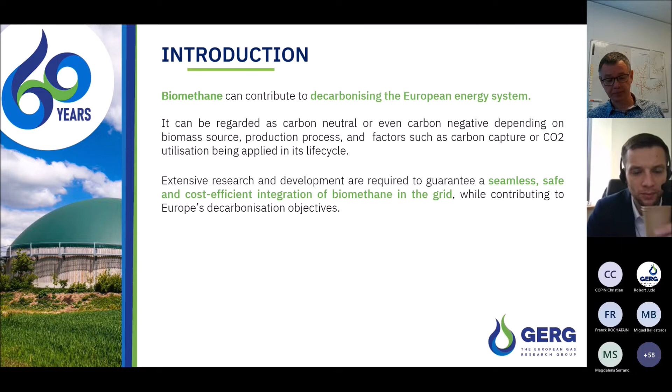As you probably heard, we have 3 sets of roadmaps being prepared: one on methane emissions, one on biomethane, and one on hydrogen. Today I'll shortly take you through the one on biomethane.

We've had an ongoing project for the last year or so, where the roadmap has been defined in close cooperation and interaction with people from the gas industry. We've been through a brainstorming phase where we identified possible R&D subjects, a phase where the projects were defined, and we have evaluated how critical the different subjects appear to be, and based on that we have created the roadmap.

So the next step will be to execute. Sorry to interrupt you, but maybe we can recall the rules, if we can interrupt or ask questions, or if we have to wait for the end of the presentation, because I saw there was a hand up and maybe someone wants to ask something. Robert or Alexandra, could you recall the rules for this morning?

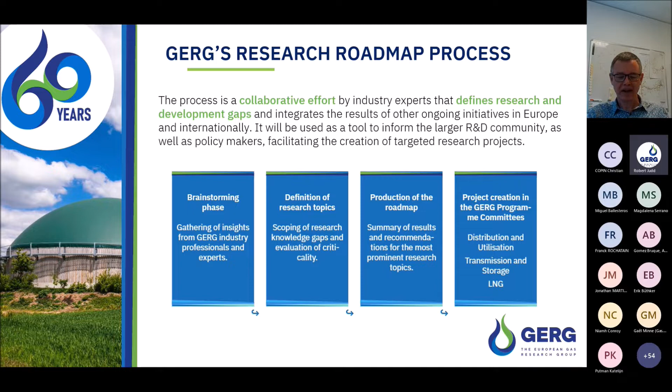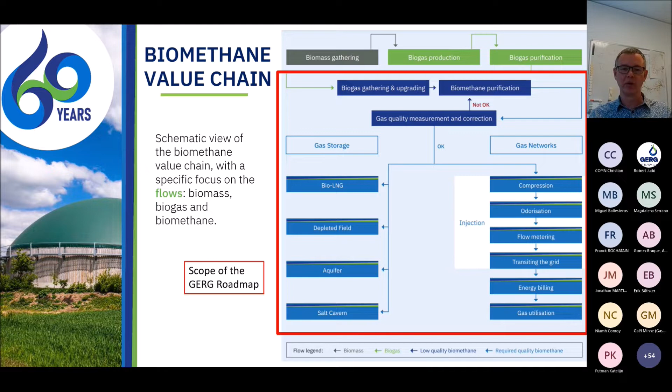Here you see the whole value chain from biomass collection to production, to billing, to utilization. The objective of this roadmap starts when the biogas is produced, so it's from gas cleaning, upgrading, all the way to utilization. That's within the scope of our work here.

So how did we do it? We've had a pretty intensive process where experts who are members of the working group have been very active, facilitated in a very professional manner by the people in the GERG Secretariat. Pretty early in the process, we decided to divide the topic into two main categories: one being the whole production value chain, and the other is the gas qualities. In the value chain, we have 4 subcategories: upgrading, gathering, injection, gas storage, and methane emissions.

In the gas quality, we have overall composition, impact of siloxanes, sulfur and terpenes, safety, odorisation, analyzers and meters, and finally billing.

We had a number of virtual workshops, which was what's possible in these Corona times, and it has worked surprisingly well, I think. For each of the 11 subcategories, the working group members could place a virtual sticker on which they have written a potential R&D area, and place this sticker on a virtual board. When all people who wished to place a sticker had done that, we went to a voting session where participants put their votes on the different stickers according to what they found was the most relevant, and where the largest requirement for research and development were.

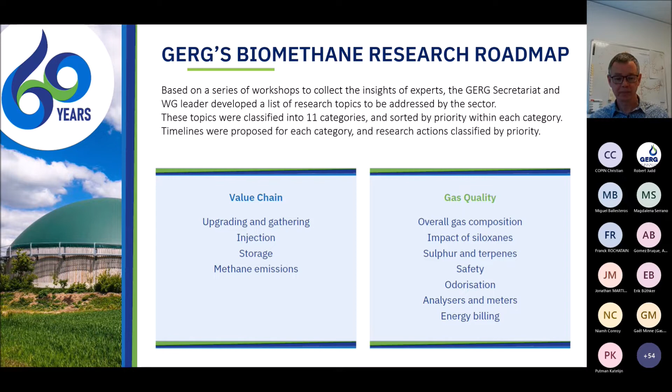Based on the outcome from that process, a very draft roadmap was written by the Secretariat, and that included a suggestion for a timeline for each of the 11 subcategories. An example of such a timeline is shown here for the category analyzers and meters from the gas quality section.

You can see the first shown here is the low-cost oxygen sensors for billing purposes. Next consists of 3 interdependent subjects, where the first is defining the requirement for the gas operators to check the gas quality, performing a benchmark of existing and developing analyzers, and the last in this 3-step is defining best practice for measuring the different trace components.

You can see most of them here marked in green, one in blue. The green ones are the ones we have defined with the priority high, and the blue are the ones defined with priority minimum, or medium, of course.

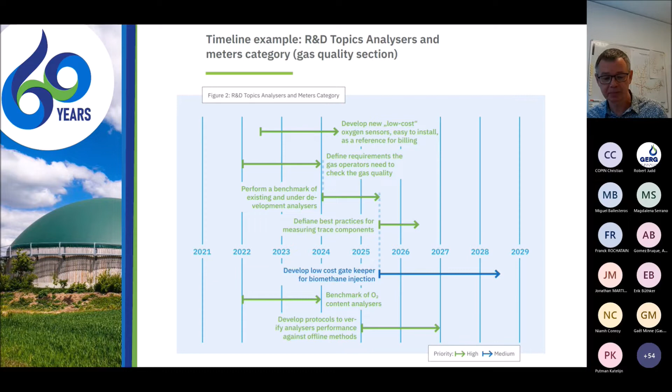Here you see some of the selected high priority areas. I will not go through them all, just mention a few. For the value chain, I would like to highlight 2 areas that I find especially important. One is the review of upgrading technologies, the pros and cons, because beside the biogas production itself, it's the most costly step in the whole biomethane process. Reducing cost will ease the way for further biomethane into our gas systems.

Another crucial issue is the impact of biomethane on greenhouse gas emissions. We need to be able to tell, in a trustworthy and well-documented manner, the climate impact of biomethane, depending on the process, feedstock, etc. As part of that, we need to limit methane emissions, of course.

Regarding gas qualities, we need to ensure that the biomethane can be used safely without damaging the appliances that use the gases. Therefore, we need more information on which feedstocks lead to which trace components in the gas. That might be siloxanes, terpenes, and furthermore we need to know to which extent we need to remove the trace components and what concentration levels can be accepted. That is something I guess we'll hear more about in the next presentation.

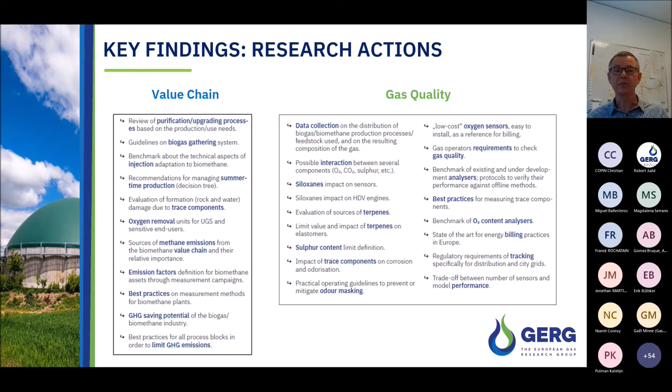Because this leads me to the conclusions. The biogas and biomethane sector is a valuable asset for the transition of the gas system and the energy system in general. Collaborative R&D work and knowledge sharing is the key to ensure this required development in an efficient way.

The GERG roadmap here is an example of such an initiative that follows up actions that are already ongoing. One is the biomethane injection best practice process. It's right now being defined, and we're soon ready to execute on that one.

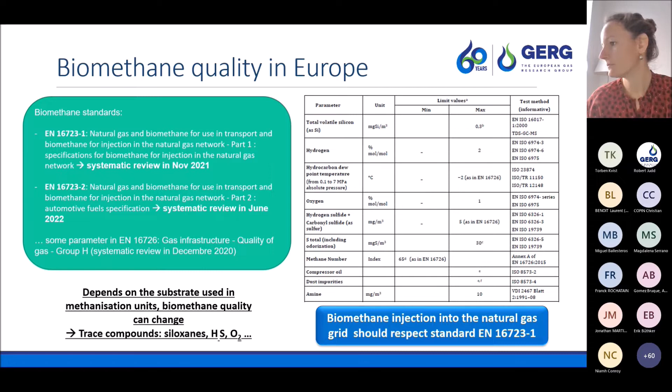Thank you. We have been working with all the gas operators and also with the European Commission, and we put together our priorities and worries about biomethane in order to conclude on what could be the impact of the trace components. The main objective of this project is to offer the conditions for a safe development, but also a competitive positioning of the biomethane chain.

It is important to have a limit value on some components that could impact the safety of the gas infrastructure, but we have to find the right value in order to not increase too much the biomethane production cost, which would kill the pathway. So it's really the point of the project to find the right balance between these two objectives.

And with all the data that will be assessed during the project, that will allow us to provide data for the reviewing of the standards, which will automatically be launched during next year.

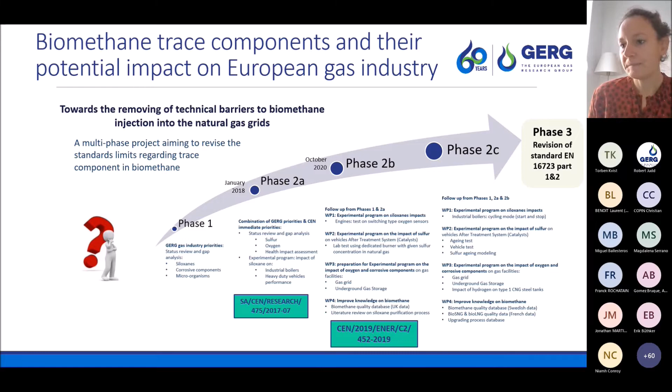The project also has a supervisory board in order to have a complete validation of the results of the project by different gas operators. In this supervisory board, we have the European Commission, the CEN TC 408 members, some biogas associations, and also end users. We have gas operators, engine producers, and boiler producers, for example.

If I go further into the details of the results of phase 2A, on the siloxane impact, we performed experiments on both applications: industrial boilers and heavy-duty engines. In both cases, we saw that yes, we can have a white deposit of siloxane in the coldest parts of the systems, as you can see in the pictures. But we haven't seen any failure of the boiler or engine during these tests, and we performed quite long tests. So we are fairly confident we can have a higher value of siloxane, but this conclusion needs to be confirmed by new experiments in phase 2B of the project.

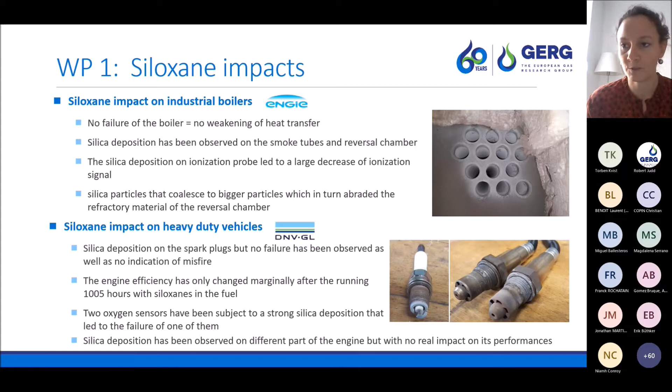On the sulfur impact, as I said earlier, we only performed a literature survey. What we've seen is that it's not sulfur alone that poisons the after-treatment system and the catalyst more precisely; it's because we have sulfur with oxygen or with water, and this reaction is what poisons the catalyst. In the literature review, there are some studies on the impact of sulfur on ATS, but not much at the concentrations we can have in biomethane. So we need to go further with an experimental program in phase 2B and phase 2C to really understand the mechanism and assess what concentration limit could be implemented in the standard. There's quite a lot of work to do on this point.

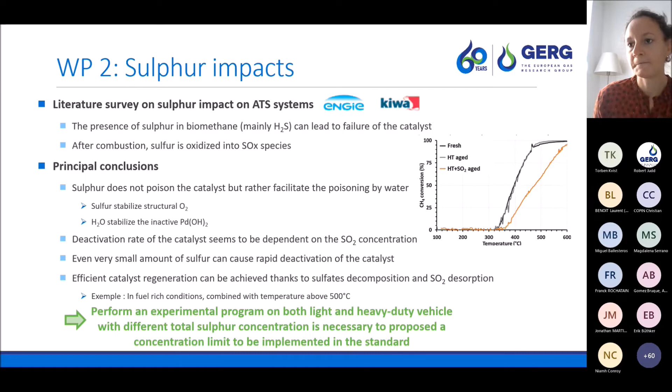On the impact of oxygen, we are studying it from two axes. The first was the impact on underground gas storages, where we only performed a literature survey, no experiments yet. We've seen that the presence of oxygen could be a source of nutriment for microorganisms in underground gas storages, mainly in aquifer ones. This oxygen can react with the microorganisms to produce H2S, which then increases the acidity of the underground gas storage, and this is what can prematurely deteriorate it. But this is what we think can happen; we don't have real knowledge of the mechanisms or the degradation processes. That's why we'll go deeper in phase 2B and phase 2C to perform experiments and get more answers on the mechanisms and how to limit them.

We also studied the impact of oxygen, and other corrosive components, on pipelines for gas transport. We know that water with corrosive components can cause problems and corrosion on pipes, but we haven't found enough information in the literature covering underground gas storage and transport conditions together. So we will perform a complete experiment on this point in phase 2B and phase 2C of the project.

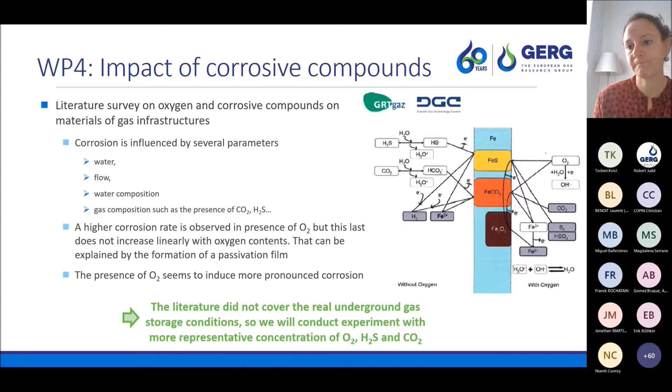In phase 2B and phase 2C, as you've seen, we performed a lot of work in phase 1 and phase 2A, and we still have work to do to get real answers for the revision of the standards. The European Commission should fund the next phases of the project. For the moment, phase 2B is funded around 2 million euros and phase 2C around 3 million euros, and we'll have a complete proposal next year. We've had some delays with the European Commission, which changed the rules to get this money, so we're handling it with Robert this year, but it's quite challenging. We hope we can really carry out phase 2C.

We will have an experimental program still on siloxane impacts, both on industrial boilers and heavy-duty vehicles, to get more precise information on the oxygen sensor, for example. For sulfur impact, we will also perform a complete experimental program at laboratory level. First, we'll test several catalysts with several H2S contents. Then, based on these results, we'll perform engine tests with just one or two catalysts in order to get real-condition conclusions.

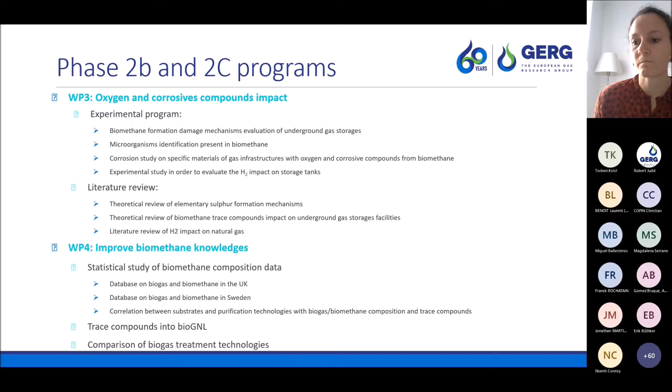So we have quite a lot of work to do, as you can see on this timeline. Phase 2B started in 2020 and ends in 2022, and phase 2C should start next year to end in 2024. All the work done in these two phases will continuously help the CEN TC 408 on the revision of the standard, so we will provide data all the way through this project.

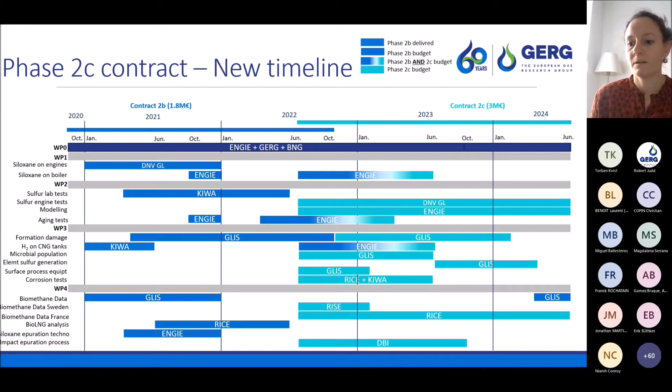So thank you for your attention, and if you have questions, do not hesitate.

I'm sorry, I think that... May I put a question? Yeah. Nikolai Kadenskyi, Head of Network Development Department, Gas TSO of Ukraine.

In Ukraine, we have proceeded with some changes in our law, so biomethane got its definition in energy law, so we started preparing secondary legislation, and as a gas TSO, we have found great interest from agriculture business to create biomethane production. We understand that right now we're facing these uncertainties with oxygen content in biomethane or in this new gas. For me, the question sounds like this: we understand that we have in Ukraine some sensitive consumers which are sensitive to oxygen content, maybe fertilizer plants or glass production, but we don't still understand the full list of these sensitive consumers.

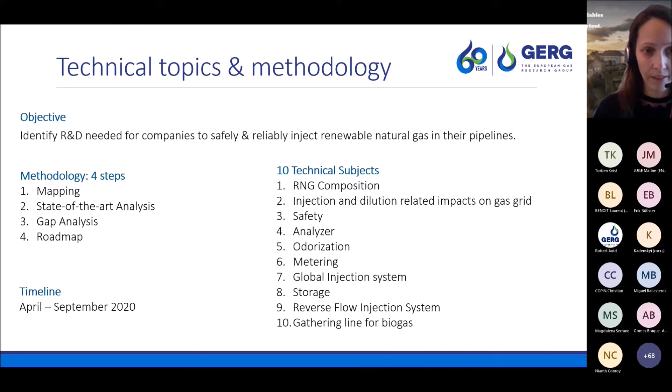So maybe you can change the slide, please. The goal was really to establish a state of the art on renewable natural gas and to create a common basis of knowledge between partners, and to identify research and development gaps. Also the idea was to propose key projects for PRCI to work on in 2021 and for 2022 and 2023.

So for the final report, and since GERG was a partner, I think you had a copy.

We include an executive level, which is a presentation of the key results and the gap, and an expert level with a summary of collected data and, at the end, all the raw data collected. We were able to identify top priorities for PRCI and also a list of possible partners to work on other gaps, and I will present to you the top priority.

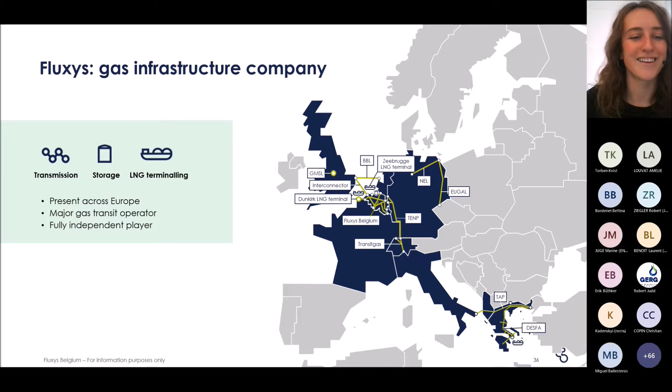Next slide please. A bit more about the relevance of the topics that we are touching upon today. For us, really, for the group, being the transporter of future energy carriers is a core pillar in our strategy. We work a lot on biomethane initiatives, on injection of biomethane into the Belgian gas grid. That's also a topic for later today, I believe. And we also invest in hydrogen and CO2 transport infrastructure, especially in Belgium, and participate in a wide range of H2 projects. But today I wanted to speak about the bio-LNG service in Zeebrugge.

So maybe next slide again. Just a few words about why we wanted to develop this service. We really see exponential growth for small-scale activity at the terminal. So there are a lot of bunkering operations in the region, growing truck loading activity for heavy-duty transport, etc. And with the available technologies that we already have, and in the framework of the current regulations, Fluxys has tried to develop a product, a service that enables our clients to meet EU sustainability criteria for their biofuel targets.

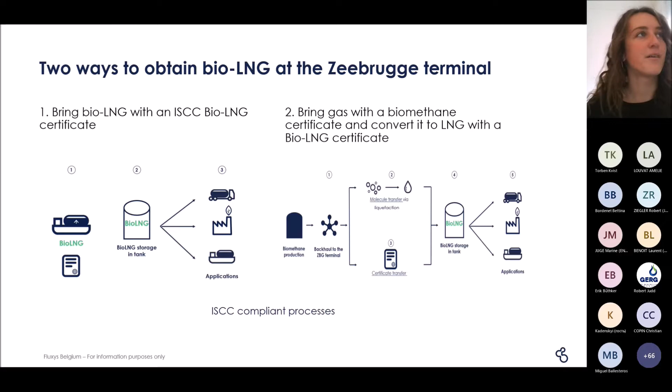So we have those two services. We see growing exponential growth for the small-scale LNG activity and growing interest for the bio-LNG service, especially for the transport sector. We have developed the service with technology that is already existing, with certifications that are in place. But the main takeaway I wanted to give today is that there are still some constraints.

There are still constraints on the recognition of the process and the certificates between different countries. We see that in countries such as Germany, where there are a lot of incentives to switch to low carbon fuels, there are still administrative and regulatory burdens on the recognition of this process, even though it's ISCC certified. I really hope to see in the future, and also for new technologies and processes being developed, a harmonized recognition of them.

That's really the point I wanted to make today - we already have some ways to reduce GHG emissions, etc., but the acceptability between countries is really a blocking factor today. That was really a brief, short introduction.

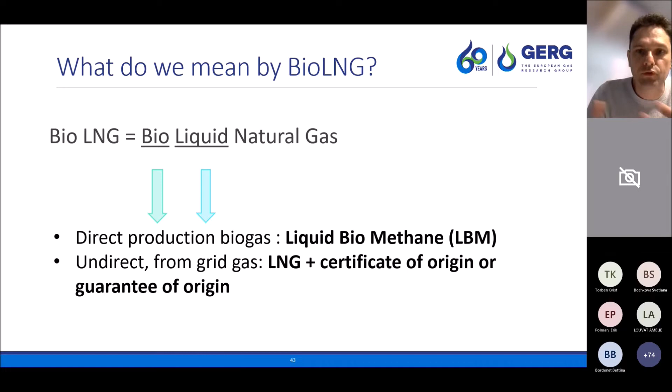But you can also imagine a different way to produce bio-LNG. It deals with liquefaction from the grid, where somewhere on this grid some biomethane has been injected. So if you buy a certificate, a guarantee of origin of your green gas, your grid gas liquefied can be considered as bio-LNG. So these are the two main types of bio-LNG.

So why liquefying? The very simple answer is simply to help ease the handling of biogas, or any gas actually. To be even more precise, the goal is to reduce the volume of storage. Typically, if you consider the volume equivalent of a full swimming pool of biogas, this mass of biogas can be reduced in volume to the equivalent of 2 bathrooms. So it's a huge reduction of the footprint, and this is the main interest of liquefaction.

And to do this, we mainly use cooling. Even if it's possible to store at higher pressure than 0 bar gauge or 1 absolute bar, currently the most common kind of storage for bio-LNG is still 1 bar. This means it is stored at a temperature of equilibrium equivalent to minus 160 degrees Celsius. So bio-LNG needs cryogenics.

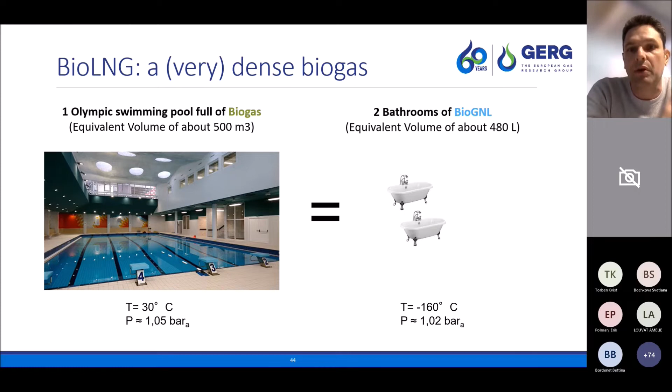And once you get your liquid biomethane, biogas, what can we do with this bio-LNG? Which markets can be addressed, and which kind of application?

So the first application is what I started to explain. Imagine several biogas plants and a biomethane injection plant connected to the grid. They inject their production into the grid, and somewhere elsewhere on the grid you can liquefy the equivalent quantity. So you can produce in this way bio-LNG if you buy the certificate of guarantee. The advantage of this strategy is that you are no longer constrained by the biogas, the biological feedstock logistics. You can liquefy as much as you can, provided you are able to buy enough certificates. So technically it's a big advantage, but the drawback is the regulatory recognition.

It's a bit like, not exactly, but probably similar to what Svetlana mentioned earlier. And of course, on the financial point of view, you have to be able to buy enough certificates.

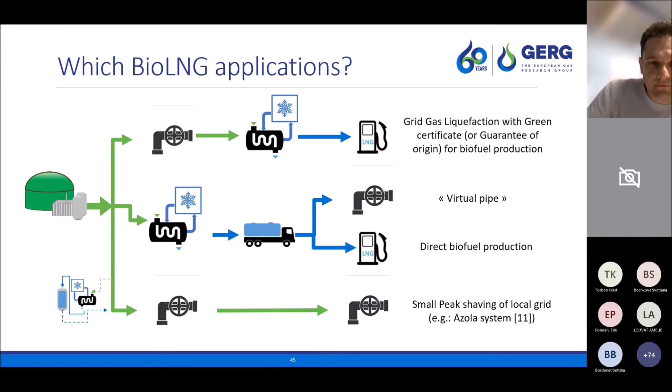So practically, when we talk about bio-LNG today, how many applications, how many plants exist? By 2021, I would say a dozen, maybe 14 at maximum. So it's of course very few. It's an industry at birth when you compare with more than 600 injection plants in Europe. It's of course a very small amount, but it's an activity in strong development.

Also, it's a very European activity so far. Most of the applications are built in Europe currently. And if you look at the type of application, today it's more for biofuel production. There are already 2 virtual pipe applications, one in Northern Ireland, in Ulster, Greenville, and the second one in France, Methabraye. So they liquefy, transport, and inject, or use it anyway on the grid.

There is also one grid gas liquefaction with buying of a certificate. It's a project currently built by Shell in Germany at Godorf. So it's much bigger feed rate, as you can see. And also there is a small peak shaving application in France at Plainval, which started 2 months ago.

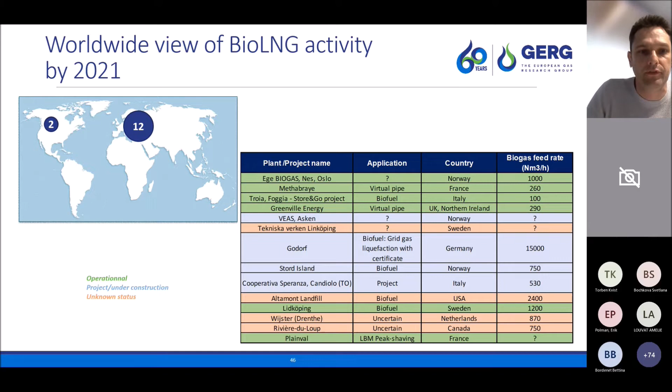So if you compare now liquid biomethane against standard LNG, and I would say also LBM liquefaction plants versus standard large-scale liquefaction plants, what can we see as a difference and a common point?

If you look at the production chain, starting with the feed gas step at the inlet, one of the most striking differences is the pressure at the inlet of the LBM plant. It's only 1 bar absolute, and it's a big difference for the process. In standard LNG, since the feed gas is coming from underground fossil origin, you can take advantage of high pressure, and for a liquefaction process, which is a cooling process, the higher the pressure, the warmer the boiling temperature, and then the cooling duty is smaller and the efficiency of the process is higher. So it's easier to liquefy at high pressure than low pressure.

So to not take advantage of this high pressure is a difficulty, and has to be overcome by using more compressors. Second point, obvious, but good to have the order of magnitude in mind: an LBM plant is maybe 500 or 1,000 times smaller than a normal large-scale liquefaction plant. So there is a totally different scale effect, and the technical economics are of course very different.

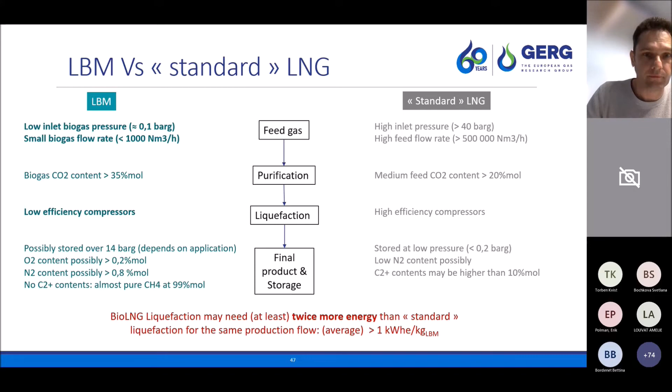So now let's go deeper into the discussion and technical features. Often when we talk about liquefaction, people think only of cryogenics. They focus their attention on the liquefaction and cooling process, but a bio-LNG plant involves much more than just the cooling and refrigeration system.

I would say if I can compare the bio-LNG plant with a Formula One car: in a Formula One car, the equivalent of the engine would be the cooling process. It's important, but if you want to win the championship, you also need good aerodynamics and good tires or road holding. The equivalent of aerodynamics in our system is purification, because the purification process has a big and important part. Also, feed gas management is a very important aspect.

So on the left, you can see a sketch of a typical biogas liquefaction plant. If you start from the beginning with the feed gas, you take feed gas at 1 bar, with almost 35% molar content of CO2, at about 30 degrees of temperature.

You compress this gas, either to beat pressure drop, but also because, as I said, the higher the pressure, the better: it's a smaller cooling cycle you need. Second, high pressure can help separate and purify the biogas. There are different strategies of compression. Of course, the more you compress, the more expensive it is for the compressor, so there is a trade-off to find.

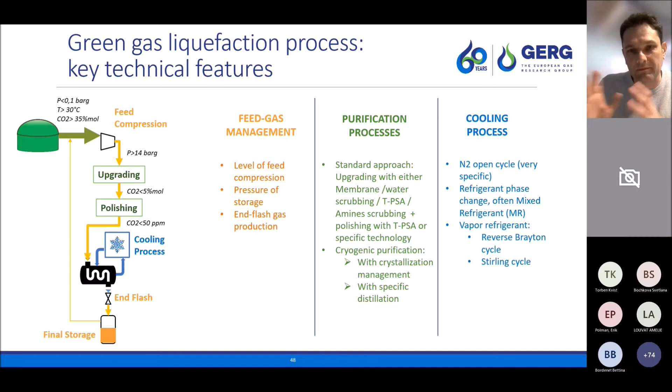Very similar on a theoretical point is the Stirling cycle, but practically it's very different, because in the Stirling cycle it's also a gaseous refrigerant, but the expansion and the cooling are made at the same time. It requires a small volume to treat, so it's good for small capacities but not for big ones.

Now we can illustrate this typical description of bio-LNG liquefaction using some existing bio-LNG solutions. This is just an example, not the full list of existing solutions, but just to illustrate this way of discretizing the bio-LNG process. For instance, Wärtsilä typically proposes a solution with phase change refrigerant, the MR cycle.

Also, I mentioned cryogenic purification, proposed by Cryopur, operated on 2 plants already successfully. As you can see, they use a mixed refrigerant cycle for cooling, but they could use any type of refrigerant cycle with their cryogenic purification system.

Also, a very interesting process is the Liqal system, which compresses the biogas, the feed gas, at almost 120 bars, very high compression. Thanks to this high compression rate, they only cool down to -70, -80 degrees, so it's almost not cryogenic temperature. Afterwards they have a liquid stream, but also a big creation of vapor, but that's not a problem. They say the gain in the refrigeration cooling cycle is balanced by the quantity of vapor gas to treat. So you see, there are many solutions. What is very interesting in bio-LNG liquefaction is that it's a very beautiful playground for engineers, because there are many more solutions existing than in the standard LNG field.

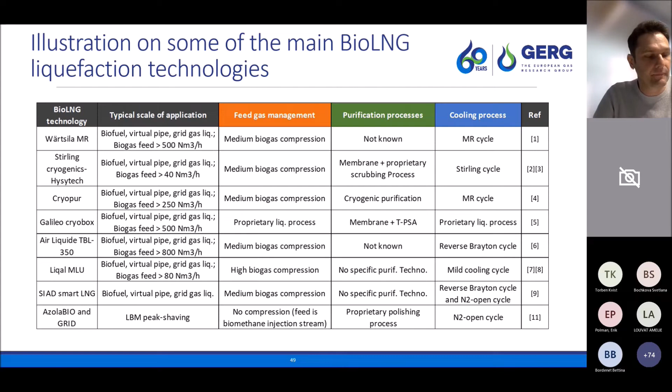Just to conclude, some figures about cost, since this is often a question asked. These are some orders of magnitude from our internal data. Today, a typical biogas plant producing, for instance, 400 normal cubic meters, which is the average in Europe, if you want to liquefy, you can find a solution which costs between 25 and 30 euros per megawatt hour. That's the most optimistic price, but realistic.

And if you double the production, there's a huge scale effect, because it costs typically 30% less. Also, a very interesting trend we saw: over the past 6 years, the cost fell by almost 20%, even 30%, mainly because there are more solutions, more technical providers, and because the field of activity is becoming more mature.

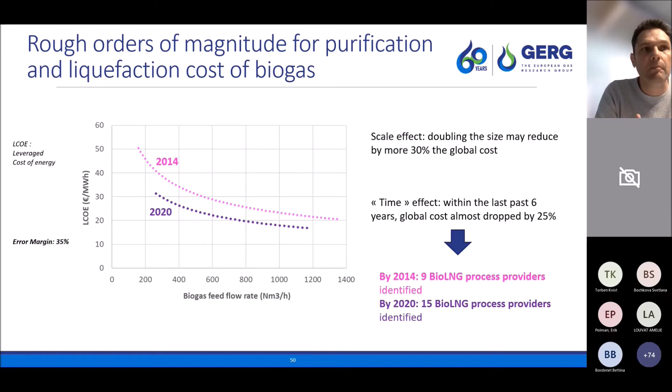So to conclude, what are the next technical challenges that we can foresee? I think on the technical point of view, the polishing stage, that is to say the final purification to minimize the CO2 content at 50 ppmv, it's not yet achieved, I think there is still room to improve the process.

There is no development as strong as with membrane or water scrubbing. So there is room for new development, and at ENGIE Lab we have a polishing test rig currently operated to improve these aspects. The second point is the standardization, the improvement of the standardization of the liquefaction technology.

Here I am talking about the series effect, which is not seen because there are only a few liquefaction plants. If you compare, for instance, with membrane cost over the last 10 years, when the number of injection plants has exploded, the cost has decreased strongly because of a series effect. So we can see this also with liquefaction if the development is kept.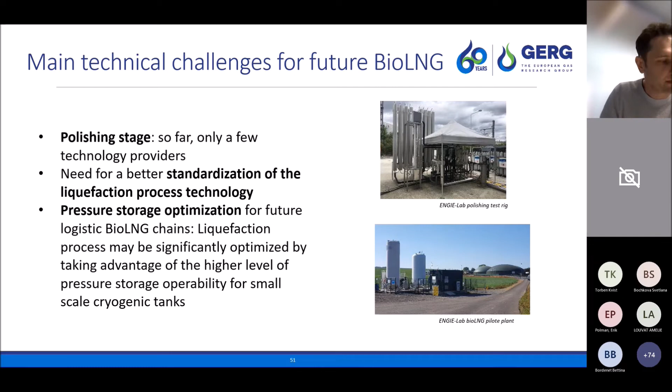Thank you for a very interesting presentation. And a lot of clapping hands, I see. That's good. Is there also raised hands?

So the question about oxygen. True, at the end of a liquefaction process, you could actually separate oxygen and nitrogen due to the final end flash, and you could recycle it into the digester. So it's possible, definitely possible, but sometimes we don't like to connect too much the two processes so far. I think in the future it will be a way to recycle oxygen and nitrogen and not keep this oxygen in the final bio-LNG or LBM. It's definitely a way, yes.

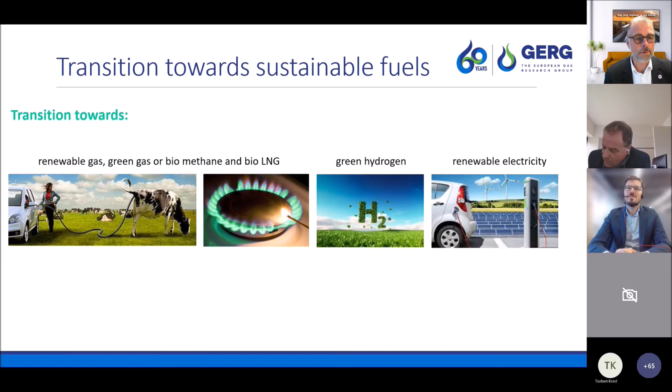A little bit about the background of TC408 - I think it's also very important to understand that the group who is active for biomethane, PC408, is working very closely together with CEN-TC234, which is focusing on normal distributed gas, fossil distributed gas. So a lot of the specifications in biomethane are directly referred to CEN-TC234, and that is also the way how we set up these standards.

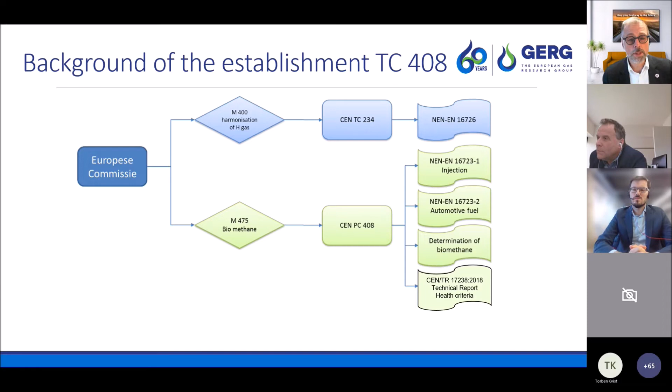There are two standards published: the specifications for biomethane for injection into the grid, and the standard for its use as automotive fuel. We have also published a technical report about the health criteria elements of the trace elements in biomethane. I will come back to that later.

So to specify the scope of PC408: mainly, if you have your biogas, your upgrading facility, then part 1 describes injection into the grid, and then you can use it for household applications, for industrial applications. But if you want to use it as automotive fuel, there is a second part which describes the specification as automotive fuel.

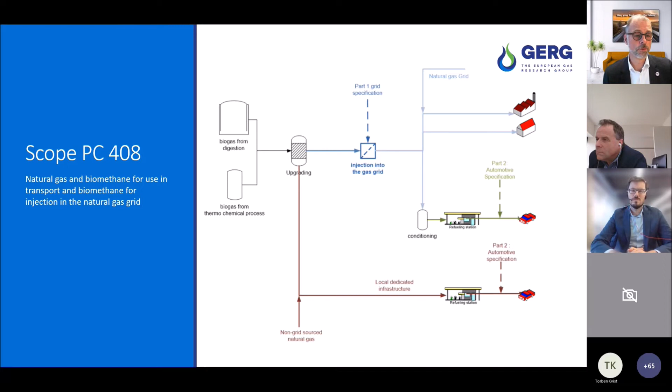Also, we specified non-grid source natural gas, and that's, for example, when you're talking about bio-LNG. You can use bio-LNG for injection into the grid, or you can use it as automotive fuel. So that is defining the scope of the standard.

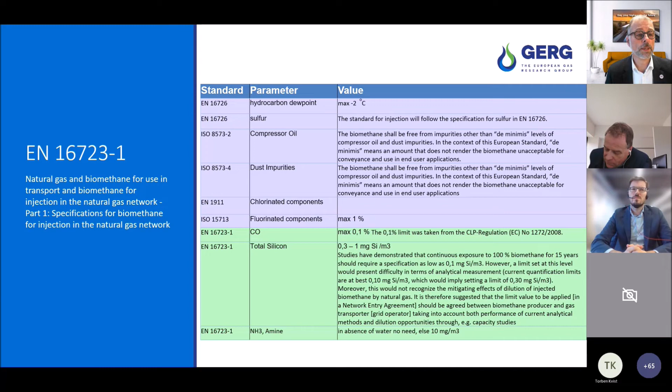And here you see all the elements we are describing in the standard. All the elements described in blue are defined by the other standard. All the elements defined in green are described by CEN-TC408 and are specific for biomethane. The same applies for the automotive fuel specification.

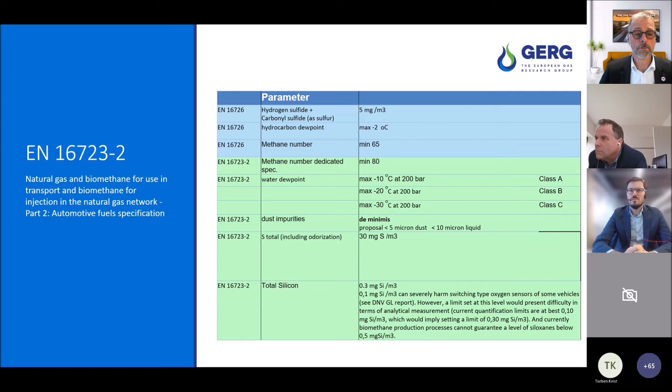So hydrogen sulfide, carbonyl sulfide, hydrocarbon dew point, methane number are standard specifications for natural gas. The green elements are the elements described for biomethane as used as automotive fuel. I think the presentation will be shared, so you can have a look at it later.

And the technical report covers the limit values based on health criteria assessment. So if you ignite your stove and you have biomethane in the natural gas, how much of those components can be in the biomethane before it has a health effect? Those limit values are very, very low, and there are no obstacles for that. The reason it is a technical report is that it's all based on studies and different models which were used, and that's the reason to at least describe the way how it was determined.

The new activities of the TC also involve working closely together with ISO TC193, because when we set up all those specifications, we figured out that not all measurement methods were available and standardized. So we are working closely together with ISO TC193, who is setting up those analysis methods.

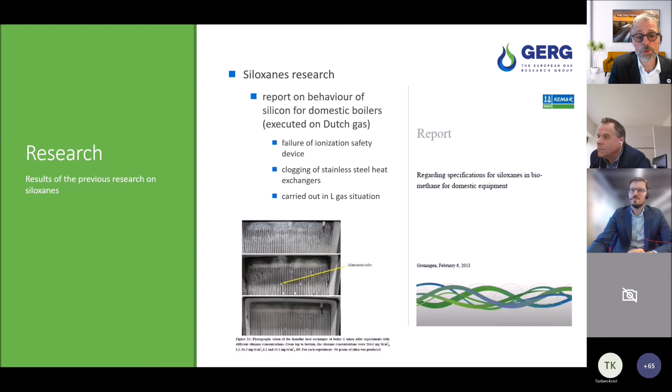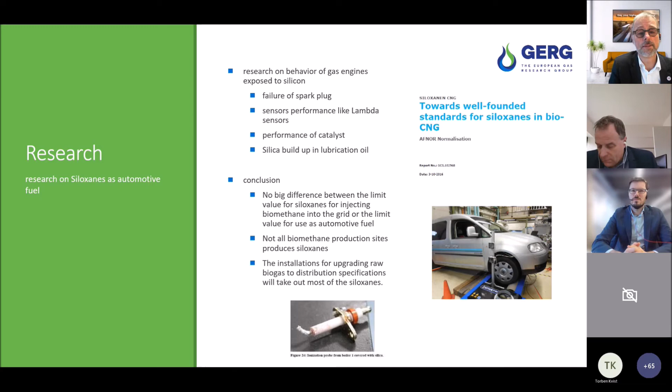And of course, the research project, which was clearly explained by Marine - the previous research on siloxanes, the report published in 2013, was basically Dutch research on the effect on boilers. That is now extended in the GERG research project. And the result of that research will be used in the revision of the standards. The same for siloxanes in biomethane and the effect on engine performance - this report was published in 2016. Now we are doing the research again, also for heavy-duty engines, and that's also performed in this GERG project.

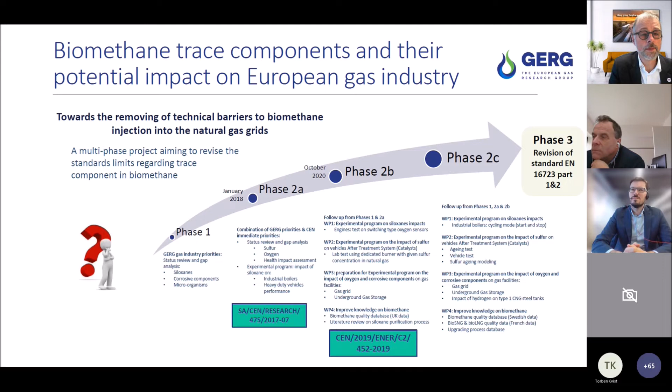So yeah, the same slides were already presented - trace components and the potential impacts on the European gas industry. This is the project which is currently going on and which will be used for the revision of the standards, 16723 part 1 and part 2. So that is, I think, the short introduction of the TC activities.

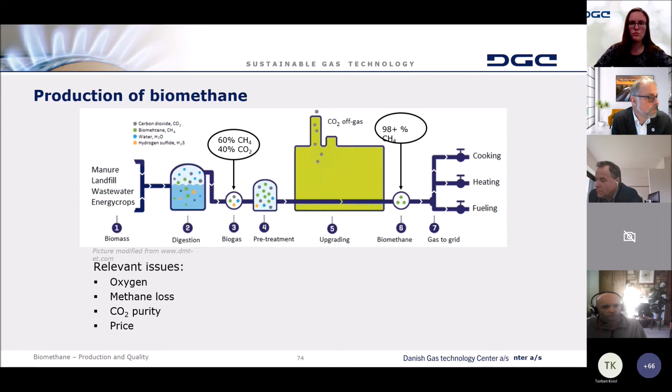Some of the methane can be lost together with the CO2 stream, and that's bad from a global warming perspective, but also bad from an economic perspective because it's a sellable product that you just lose that way, so you want to keep that as low as possible. Then there's the CO2 purity - these days we talk of CO2 capture for either storage or together with power to X to produce methanol and otherwise, so it's interesting to produce the CO2 as pure as possible. And then, of course, is the price, because you want this biomethane production to be competitive compared to other green energy sources. So those are important factors to look at, and they depend on the upgrading technology that you choose. I'll just briefly go through those and how they relate to these focus points.

Next slide, please. So the water scrubber is a good and well-known technology where you have the biogas, compress it a bit, and then you wash it with water to remove the CO2. In order to regenerate that water, you flush it with air to drag out the CO2, which means the CO2 will be heavily diluted with air. It will also contain a substantial amount of methane that was also absorbed in the water. Because you regenerate it this way with air, the recycled water will be saturated with air, meaning some of that air will go into the biomethane. So when you upgrade your biogas this way, the biomethane will naturally have a content of air, meaning oxygen.

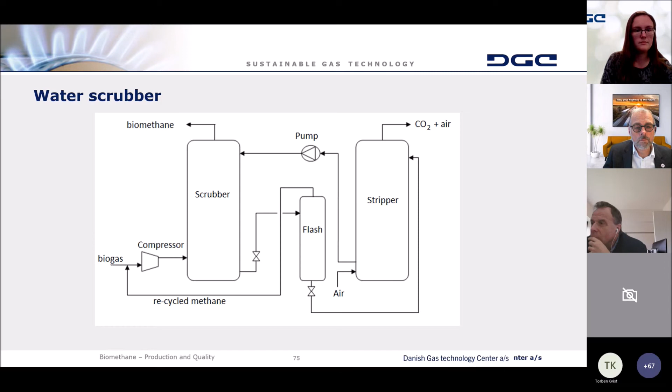Next slide, please. The amine scrubber is relatively similar. Here you wash the biogas with an amine that also removes the CO2, but in this process you regenerate the amine with heat, where you boil off the CO2, meaning the CO2 will be very pure and there's very low methane loss. Since you don't add any air, you have the potential to produce the biomethane with virtually no oxygen in it. The drawback of this process is that it's quite heat intensive, so in order to make it economically feasible, you have to be able to recover that heat and reuse it somewhere else.

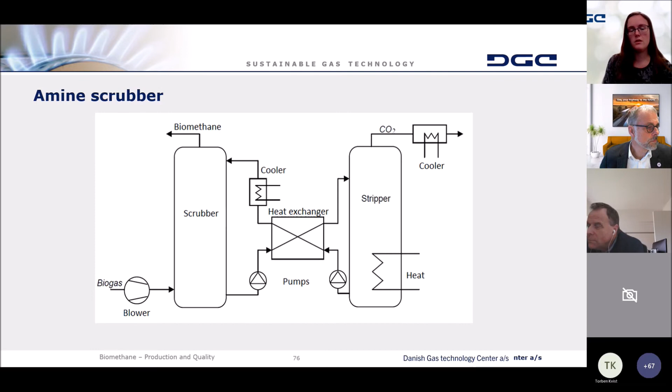Next slide, please. Then there's the membrane process. A membrane is sort of like a sieve, so the CO2 can move through it while the methane is kept retained. You normally do that in a series of steps, where you first pass your biogas through one membrane, producing a more methane-rich stream which is not ready for injection yet, and then you have a second step to produce the biomethane and recycle the more CO2-rich stream. In the same way you have a third step for the CO2-rich stream, so you produce CO2 that's relatively pure and again recycle. We have these recycles to keep the methane loss as low as possible, but there's some methane lost with the CO2. Still, you produce a quite pure CO2 stream, and the biomethane has the potential to be very close to oxygen-free if possible.

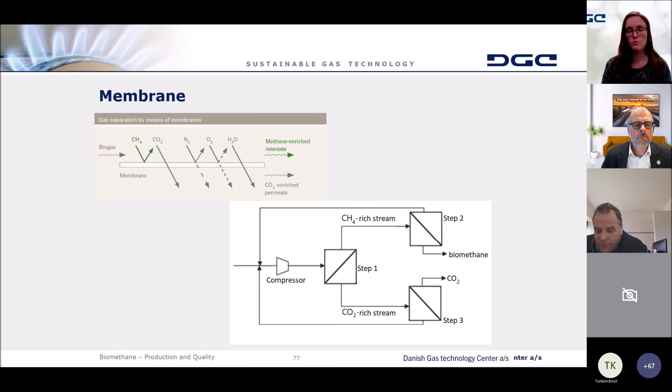Next slide, please. And then there's the PSA process. Disclaimer: I know very little of this because we have no PSA processes in Denmark, but I included it since I know it's much more used in the rest of Europe. The overall idea is that you compress the biogas, and then you have these beds containing material where the CO2 is adsorbed on the surface. So you lead the biogas through, the CO2 is adsorbed on the surface, and you produce the biomethane.

At some point, this material is filled up with CO2. You need to recover it, so you lower the pressure to remove the CO2. In this way, you don't add air, so I assume you should be able to produce biomethane with very low oxygen content. But the methane loss, as I've understood it, is quite high, which might also influence the CO2 purity.

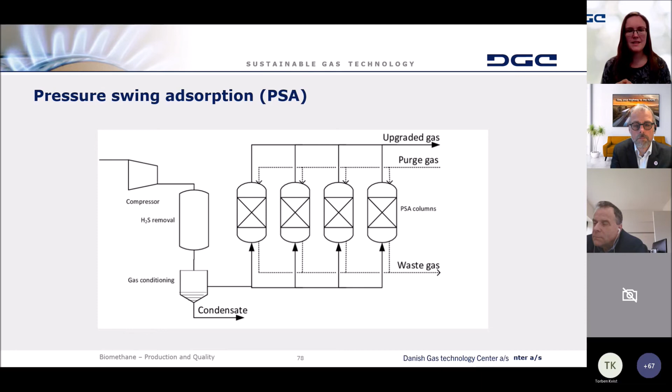Next slide, please. And then just a table to summarize what I've said here. So with oxygen content, you can produce it with very low oxygen content from the amine, and you should also be able to do that with the membrane and PSA process if you avoid adding oxygen in the earlier parts of the biogas process, while the water scrubber is unable to produce with lower than 0.2, 0.3% of oxygen. So if you want to avoid adding oxygen to your gas grid, you need to do some catalytic removal, which will of course be an extra expense.

For the methane loss, the amine scrubber has a very low methane loss, and the membrane is also in the lower-ish end, while the water scrubber and PSA have quite high methane losses. In Denmark, this means that many water scrubbers have started having RTOs installed on the CO2 stream. That's thermal oxidation or combustion of the remaining methane. That solves the global warming issues, but of course you still lose your product.

For the CO2 purity, again, the amine scrubber has a high purity, and the membrane and PSA should also be able to produce high purity CO2, while the water scrubber is diluted heavily with air. Then DGC did a study a few years ago about the expenses for this upgrading process and sulfur removal isolated, and it's around 6 to 10 euro cent per cubic meter of methane to do this upgrading process, make it ready for grid injection.

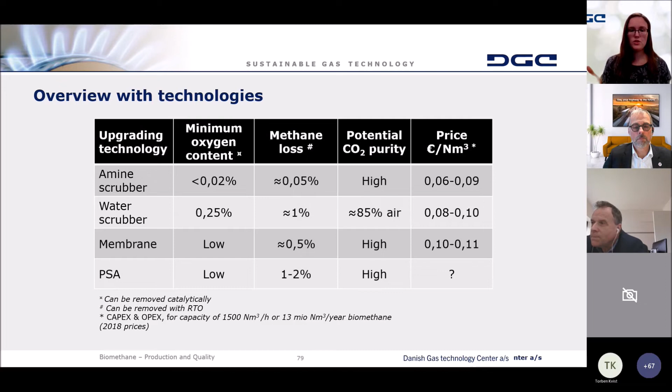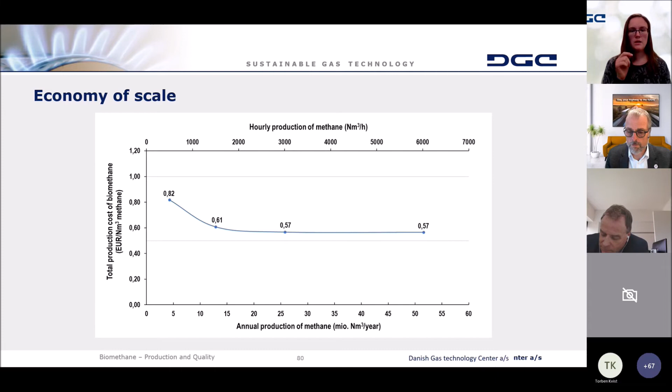And for the upgrading process, the best way to lower cost is to choose an effective and cheap way of sulfur cleaning and to have a high degree of reuse of this heat if you have an amine scrubber. And of course to keep the plant running as much as possible, because it's just expensive to have it not running. Yes, that was it from my part.

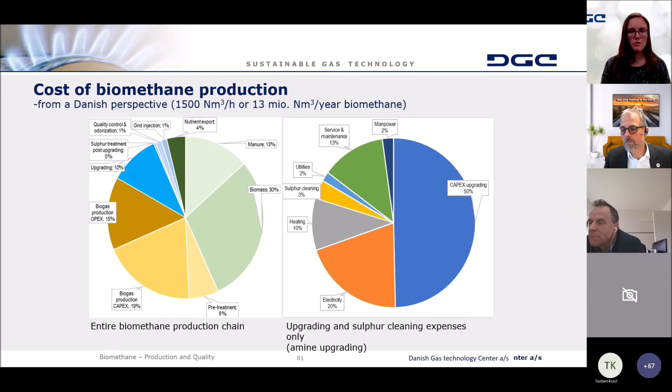Okay, thanks for the previous presenter. A lot of clapping hands.

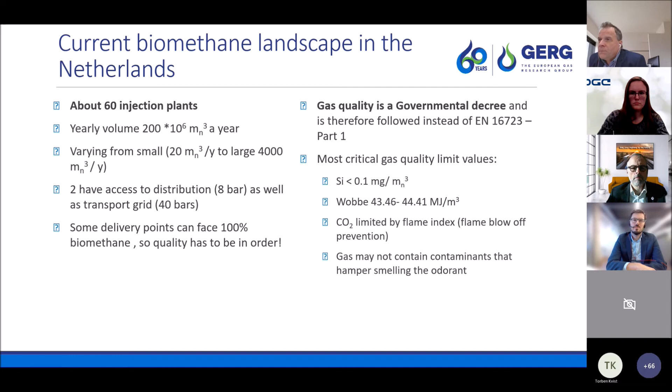I haven't mentioned that the biogas producer is responsible for the gas quality, and it is delivered at an entrance point to the grid owner. The grid owner has nothing to do with the manufacturer of the gas and nothing to do with the purification of the gas. That means that position is a difficult one for the grid owner.

In order to overcome any problems, there are some additional procedures to guarantee good quality control. I would like to outline those. First, there is an assessment before startup—an assessment on all the procedures the producer has to meet. That means he has to have a handbook covering how he calibrates his gas chromatograph, etc.

How is the software of the quality control? There has to be some alarm levels set, for how many times it measures the gas. In fact, it has to supply data every minute. And all that data is also transferred immediately to the grid owner, so the grid owner always has a look at the real quality parameters.

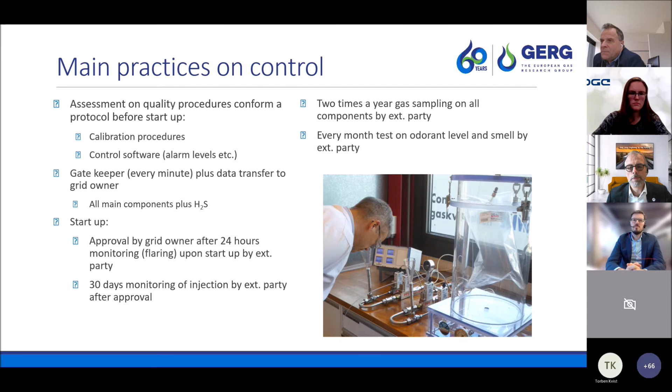I would like to add some things on, especially, the smell and the way people can act on that. That's the next and the last slide. If you can give that, yes.

On smell, there are some critical components. As you all know, terpenes are present in biomass, like in leaves, especially in autumn time when all the leaves are collected from the streets and put in the biomass digester. Some terpenes can end up in the biogas. Butanone is one of the components that can also influence smell, as well as H2S.

In the beginning we had quite some issues with smell, but it has decreased significantly, and that is due to some measures.

The first measure is that you shouldn't accept gas that is out of smell specification, and you have to be quite strict about that. For example, if it occurs once or twice in a row that the smell is not good, the grid owner can say: okay, you are shut off from the grid. That costs a lot of money, because it's very costly for the producer not to inject into the grid and to flare it off instead. But if it's necessary, it has to be done.

It turns out in practice that there is always a measure to control smell issues. It can be done through strict control of the biomass input, because some biomass gives more problems than others. There are also ways to control it.

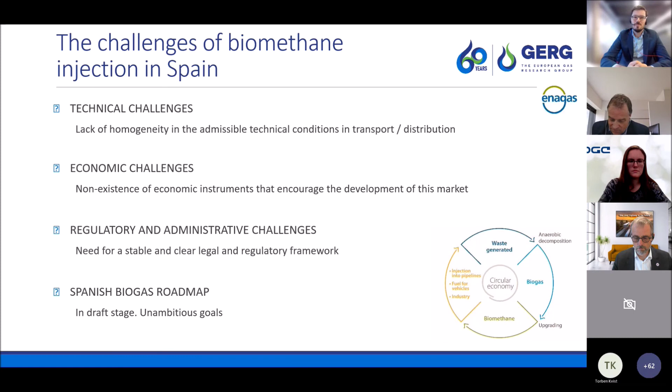Regarding the composition, I think Erik from Kiwa has already given a very detailed overview of all the challenges, and also the other Erik. There is a point I would like to emphasize, which is the standardization of the frequency for quality measurement, for example, the challenges next to oxygen, and the differences between transmission and distribution standards.

For example, in our national royal decree, the limit in transmission is more restrictive than the European standard, and therefore it could be a challenge in the future if we have a reverse flow from distribution to transmission. This is derived from the fact that the European standards are not fully copied into the national legislation.

Also, the responsibilities for measurement are not clear. There are different criteria depending on whether you are in the transmission or distribution network, which is always a challenge for the biomethane producer. And regarding authorization, there's a need to harmonize who's responsible for authorization, not only for the installation, but also for the surveillance.

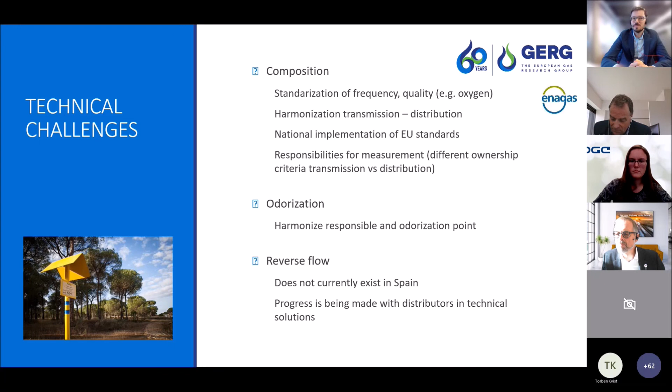Regarding support schemes, I think there is a lack of any of them. Basically, there is no feed-in tariff, there is no feed-in premium either.

Even though we believe that if the national GO and certificate registry gets ready soon - there is already a draft decree in process - that will possibly give sufficient boost to the biomethane market. So a very good working European-wide system might be sufficient if linked also to the ETS to encourage biomethane production.

Regarding tariffs, there is also a difference between transmission and distribution networks. The European Tariff Network Code, which sets the general rules for all network tariffs in Europe, foresees potential exemption for biomethane injection points if they are on distribution networks but not on transmission networks. This poses a challenge, because whether biomethane is better injected on transmission or distribution networks should depend on the size of the plant and on technical grounds, and not necessarily be conditioned by incentives.